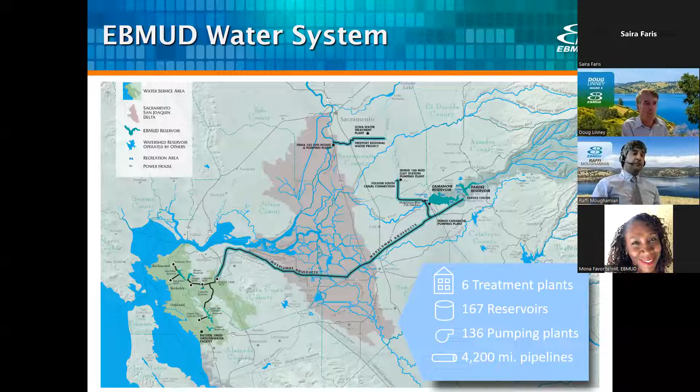These four pipelines are the lifeline to the City of Alameda's water supply. There are no reservoirs of treated water, so if any one of these pipelines fails, it can affect the level of service to the city. The district realized this was an issue and initiated a master plan study to improve the water feed to the City of Alameda.

That master plan was titled the Alameda-North Bay Farm Island Master Plan. Its purpose was to ensure long-term reliability, meet existing and future demands, and replace aging infrastructure. The master plan recommended replacing the 4 existing crossings with 3 new pipeline crossings.

The master plan also prioritized the crossings, and crossing number 1, the Oakland Inner Harbor pipeline crossing, was given top priority. After the master plan was completed, the district completed an environmental impact report, which examines the project, its impacts, and the mitigation measures the district will take throughout construction.

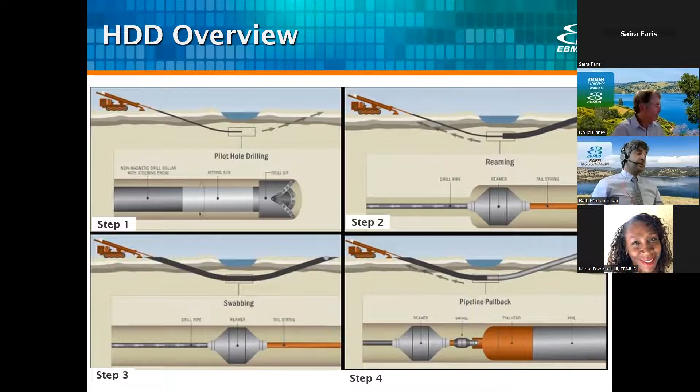Step number 4 again requires some drill rigs to be set up, and we're going to be setting up a drill rig both in Oakland and Alameda. This is kind of what the drill rigs look like that will be set up in Oakland and Alameda.

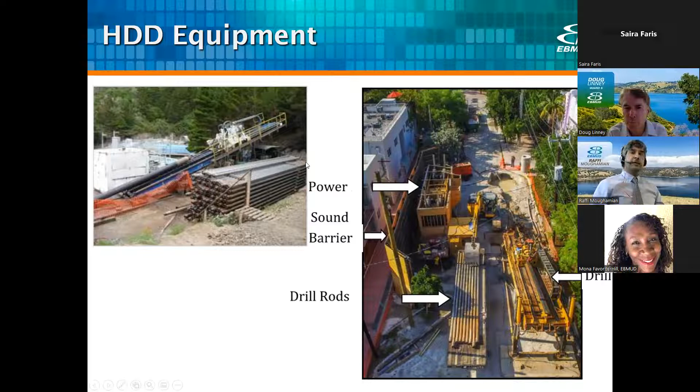This HDD equipment, again, will be staged in Oakland and Alameda. Here, this figure shows the area where this equipment will be staged on the Oakland side, at the end of Fallon Street, the very end.

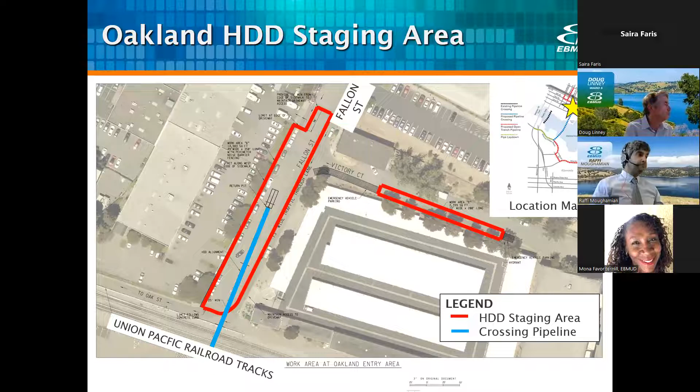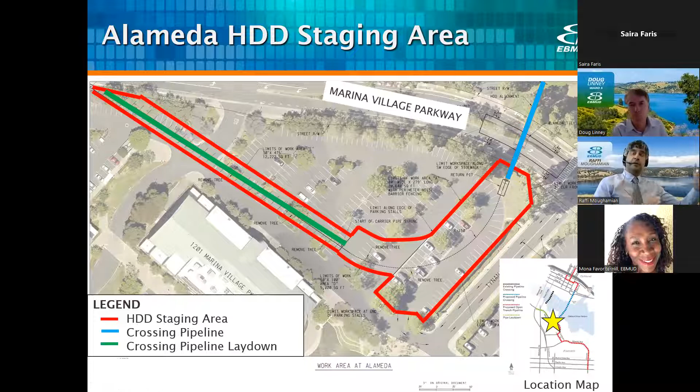We'll start in this area, and then we'll work our way north. In my next slide, I'm going to show the crossing pipeline laydown area where we're going to be staging this crossing pipeline, the 3,000 feet of it.

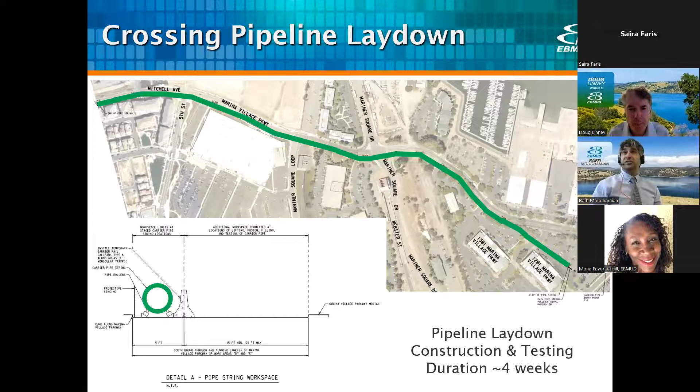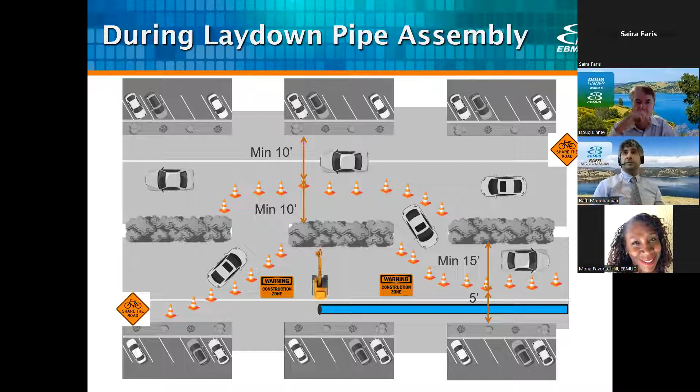That was the HDD construction methods and, again, where we're going to be installing it. I'd like to now focus your attention to the open trench pipeline installations.

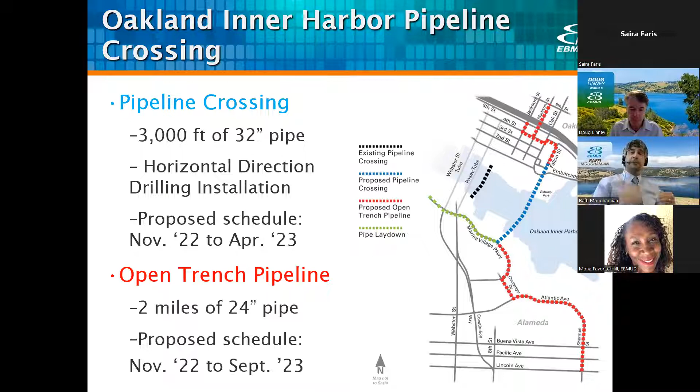Just to warn you, we're not going to be closing this entire 2-mile stretch down all at once. We're going to be going block by block closure. My next few slides go over what that exactly means and how we're going to be constructing it and progressing, building it in stages.

So the open trench method—this is a slide showing how the construction will occur. Say we're putting the pipeline in Madison between 8th and 7th Street. We set up our traffic control, again ensuring that there is some traffic flow through there.

The first thing that steps in, we have saw cutters, which cut the existing pavement. After that pavement is cut, an excavator comes in and excavates the trench where the pipeline will be laid in. Once the trench is built, we'll lay the pipe down, join it up, and it'll be fused or welded together.

Then we'll backfill the material, putting material back into the trench so it's not a big hole. We'll put temporary paving over it so vehicular traffic can drive over it. Then that equipment will be demobilized, and we'll move to the next block.

Again, we're not closing large sections, miles of streets or impacting miles of streets—it's block by block. We'll start the process all over: saw cut the pavement, excavate the trench, lower the pipeline, and then backfill and temporarily restore pavement.

Now that was a nice graphical picture showing an idealized version of what open trench construction looks like. Here's some pictures showing the actual open trench construction. These were taken on recent jobs where we have a same-size 24-inch pipe.

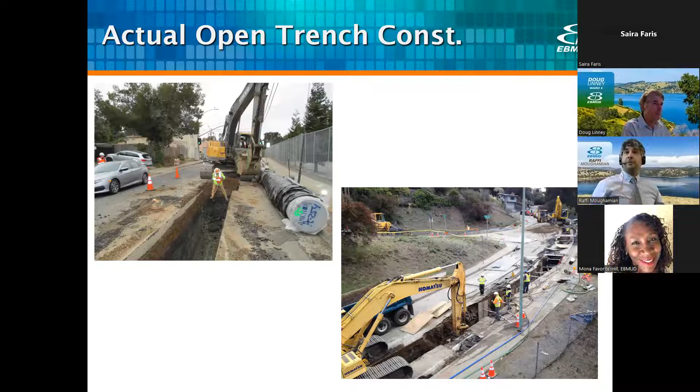I mentioned in the previous slides about lane closures and closing off detour routes. So this is an example of the type of traffic control you'll be seeing when we are working in a lane. Here we have our excavators digging the hole and the trench, and also laying the pipe down, so we're taking up this entire lane.

The cars can travel around the work zone area. Also, in this situation, we're not going to be impacting the pedestrians on the sidewalk. The sidewalks will remain open as well.

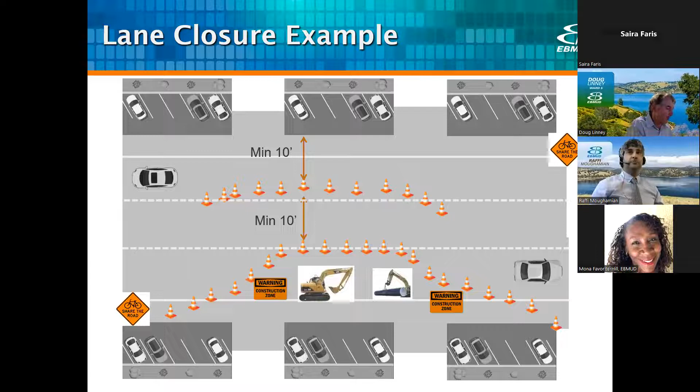Typical work hours for all these activities: on the Oakland side, it's 7 a.m. to 5 p.m. Although along Madison between 8th and 5th Street, and at the intersection of Jackson and 5th, those are reduced a bit to 9 to 4, because those are main corridors for the Caltrans 880 on-ramp. So we're avoiding the large commute hour impacts, cutting it a little shorter in the afternoon for the afternoon commute.

In Alameda, the hours are 7 a.m. to 5 p.m. And then the HDD pullback, that's going to be a continuous 48-hour period. Once we start pulling the pipe into the hole that was bored, we can't stop the pulling, so that needs to happen over a continuous 48-hour period, and that's actually going to happen on a weekend as well.

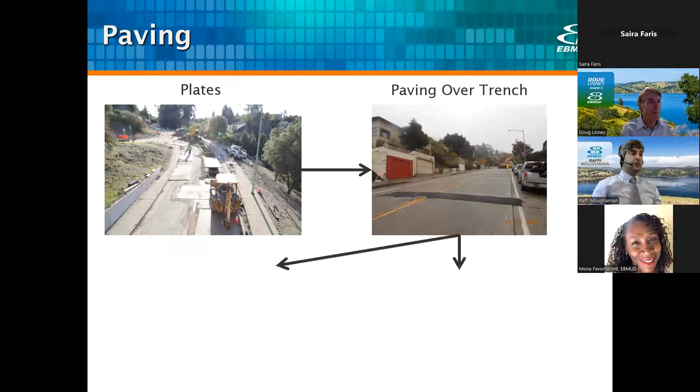Once the pipeline is laid down and the backfill is complete, we put temporary asphalt paving over the trench. Then at the end of the project, we'll do our final restoration, where we'll do a nice T-cut, shown to the right here, for a smaller section. There could also be a larger section, depending on what was agreed upon with the City of Oakland and Alameda. We worked on these trenching details with both cities.

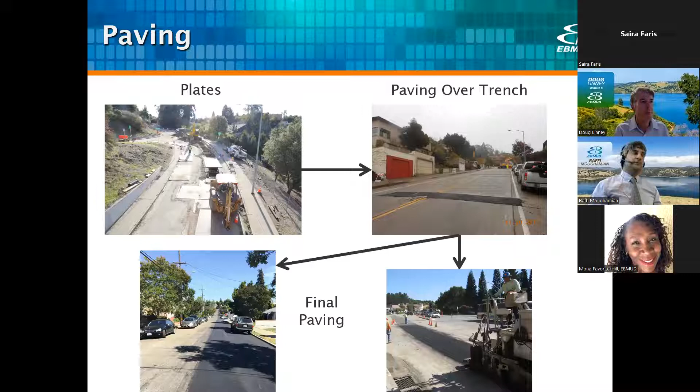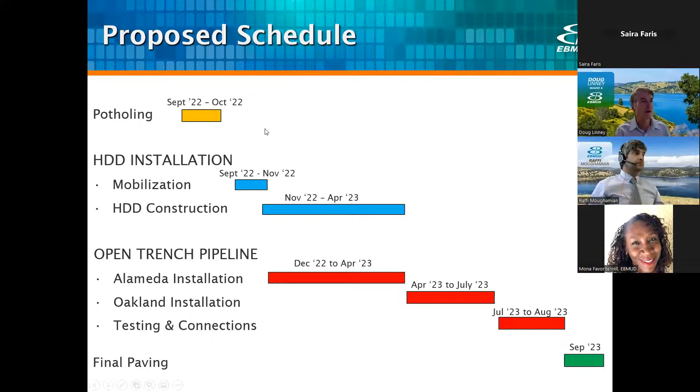That concludes my presentation, and I'll pass it along to Saira.